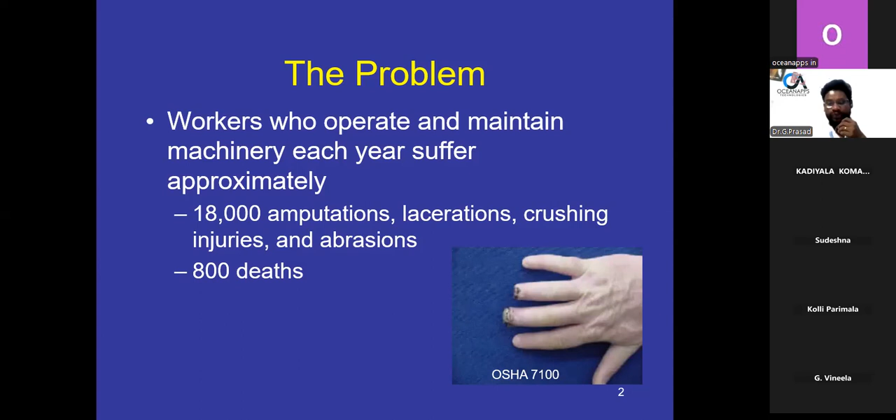See, approximately 18,000 injuries to employees and workers, and 800 deaths. What is the problem basically with the machinery associated with amputations?

That means if you have a good idea - number one, mechanical power presses, whatever mechanical power is supplied to the particular machine, power press brakes, power and non-powered conveyors, printing presses, roll forming and roll bending machines, shearing machines, food slicers, meat grinders, meat cutting bandsaws, drill presses, milling machines, grinding machines.

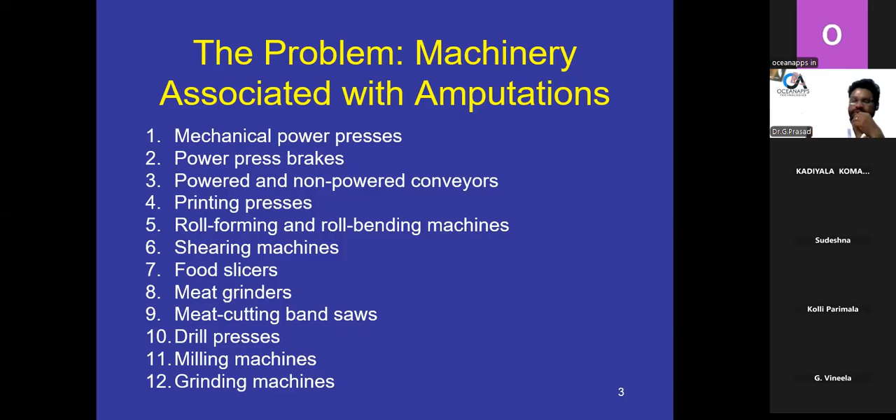These are found in one particular industry. If you have another industry or company, there will be another number of machineries. These are all called machine related problems or machine related hazards. So you must know each and every problem regarding these machines.

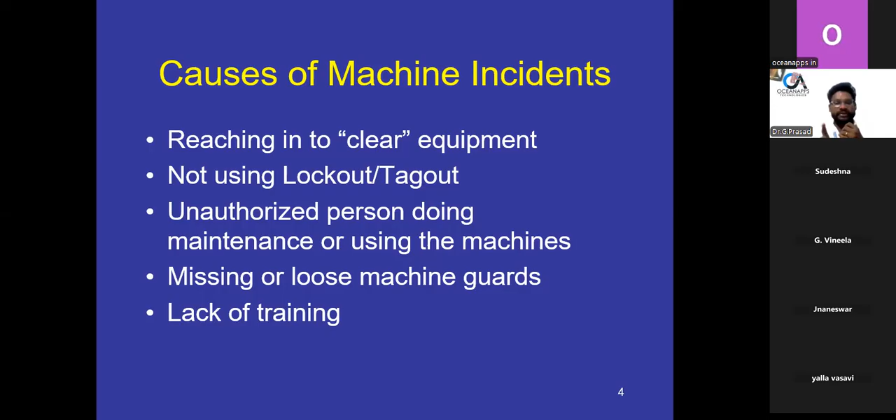Prevention is nothing but a barrier. Prevention is nothing but a stoppage. Prevention is nothing but we have to give a stoppage to all things.

In prevention, what do you have to do? Any machine part or function or process which may cause injury must be safeguarded. Sometimes you have to provide the safeguard.

Next, where the operation of a machine can injure the operator or other workers, the hazard must be controlled or eliminated. Because due to the operation of the machine, it can lead to injury to the operator. If an employee working on a particular machine is not controlling it, you have to eliminate or control that. That depends upon the senior, the safety officer, or whoever is head of that particular process.

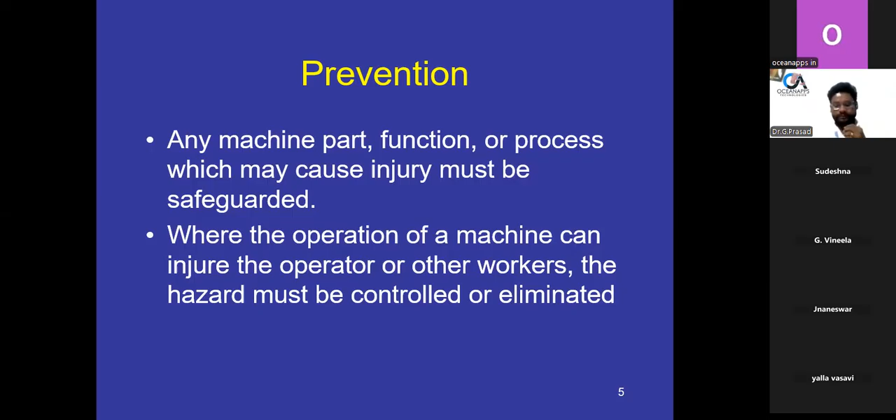OSHA citations are from the year 2010. Already told you OSHA is like a standard health and safety issue, as mentioned in previous classes. Machine general requirement is 1910.212 - the 10th most frequently cited standard, 5th ranked standard in assessed penalties. These are all standard citations.

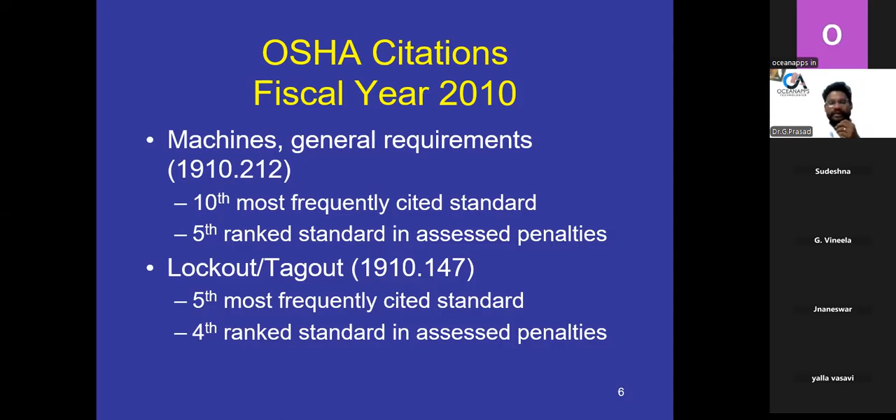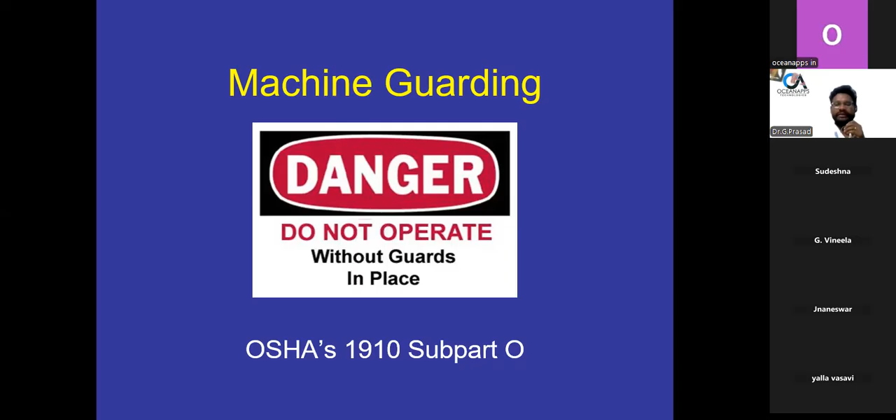Machine guarding - if a machine is not to be operated, you put a sticker on that particular machine. Here, a danger sticker says: do not operate without guard in place. That means for that particular machine, the condition is it will not operate without the guard. This is called OSHA 1910 subpart O, regarding machine guarding.

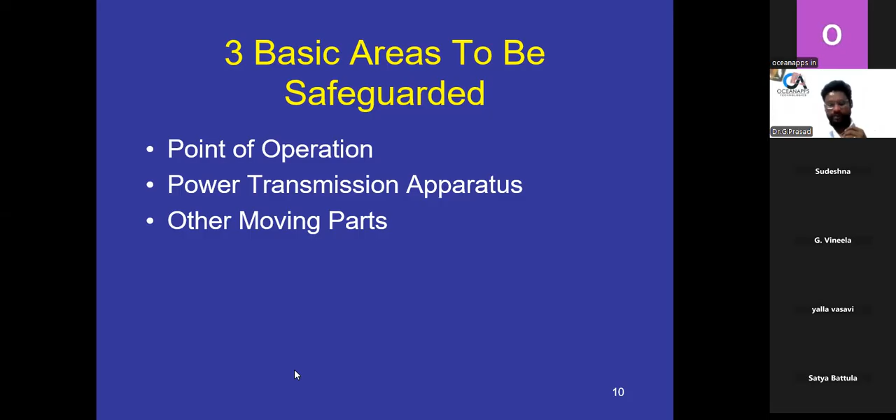Next, hazard identification, where the dangerous things may happen. Where can this dangerous hazard occur, where can these dangerous things happen.

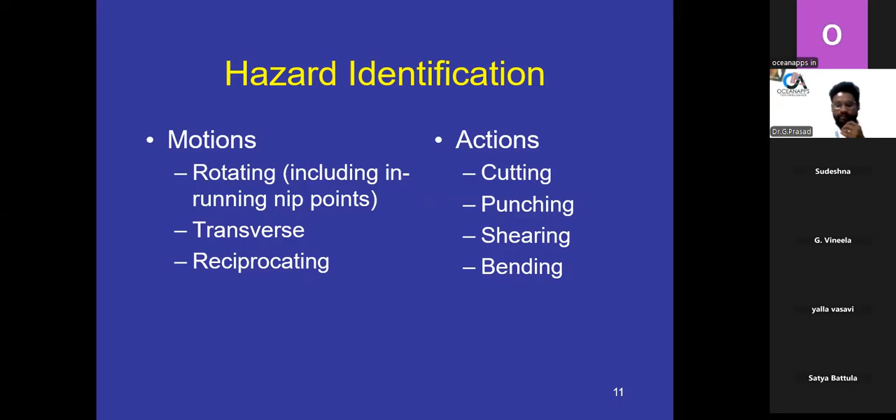Coming to the first one, as already told, rotating parts. In the rotating motion, hazard, machinery grips and move clothing, hair and body parts into the dangerous area. In the rotating part, what will happen?

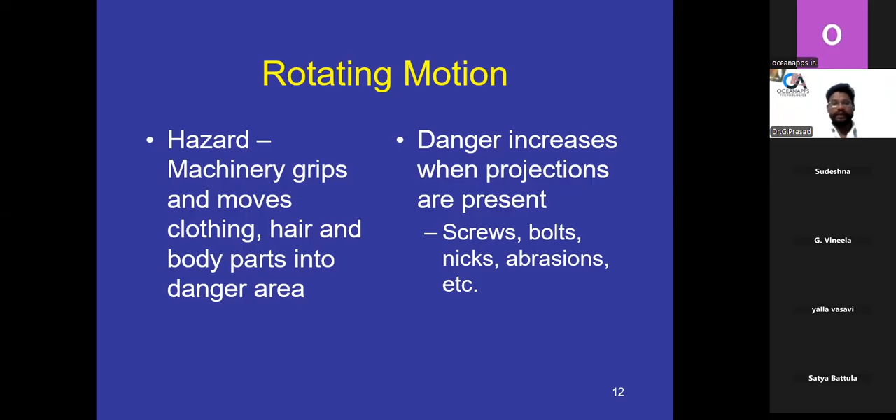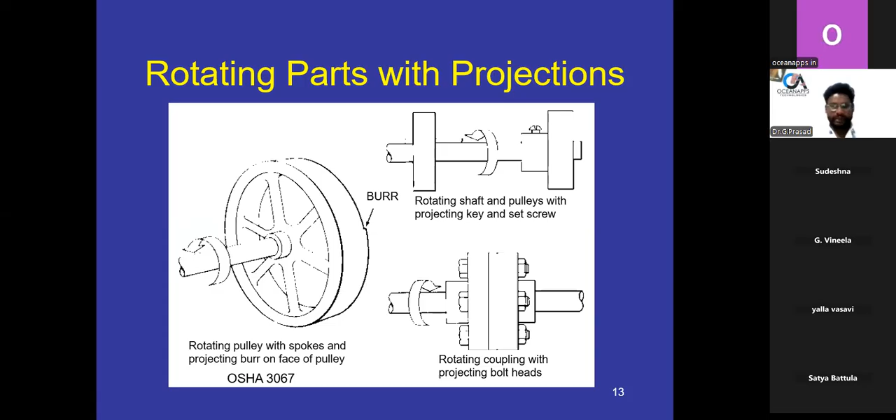Based on that wheel, if there is no guarding, no guard for that particular wheel, then automatically there is a chance to get hazard for the human body or human things. So at that time you have to put a guard. Yeah, these are the in-running nip points.

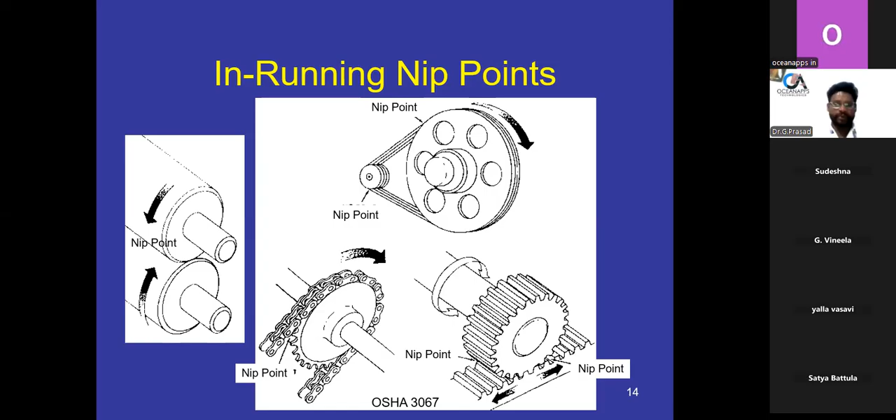So at these in-running nip points, you have to take care about precautions, particularly for those who are working on these machines - the employees, workers, or laborers. These are also machinery parts, so you have to take care about the machinery parts.

Next, second one, transverse motion - moving in a straight continuous line around rotating components. Hazard may strike or catch an employee at a pinch or shear point. This is also one type of getting a hazard or a chance for incidents or accidents.

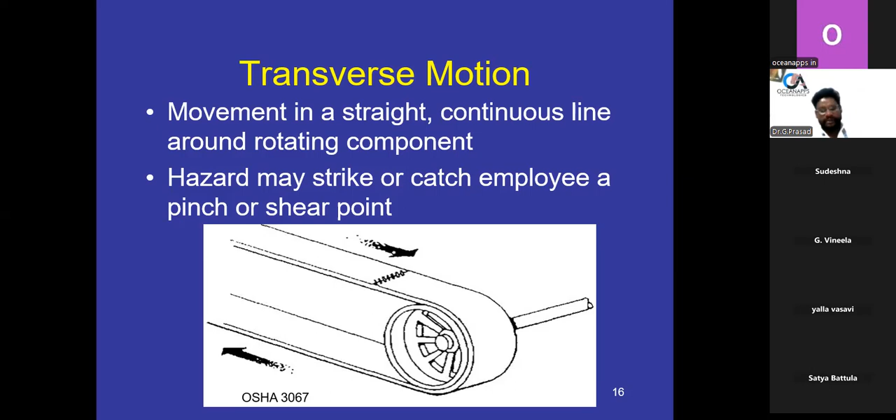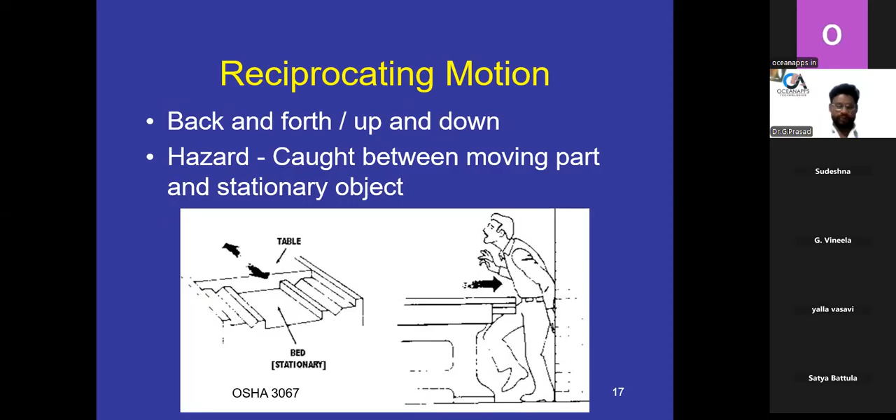Reciprocating motion - back and forth, front and back, up and down. So this is the reciprocating motion. Because while the equipment is moving between the moving parts or a stationary object, you have to avoid moving towards the moving parts, towards the up and down parts, or the front and back equipment.

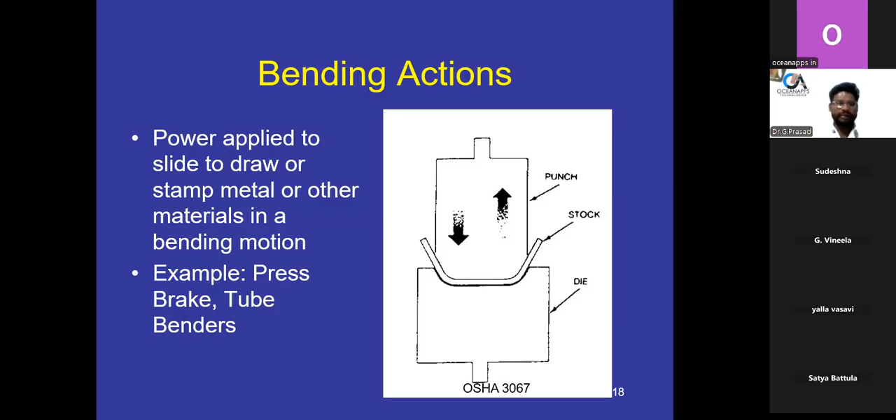This is also one type of bending action. At the time of bending action, you have to take care about power applied to the slide to draw, stamp metal, or other material. Like, where is it used? At places like bench press or press brake or tube, they use it.

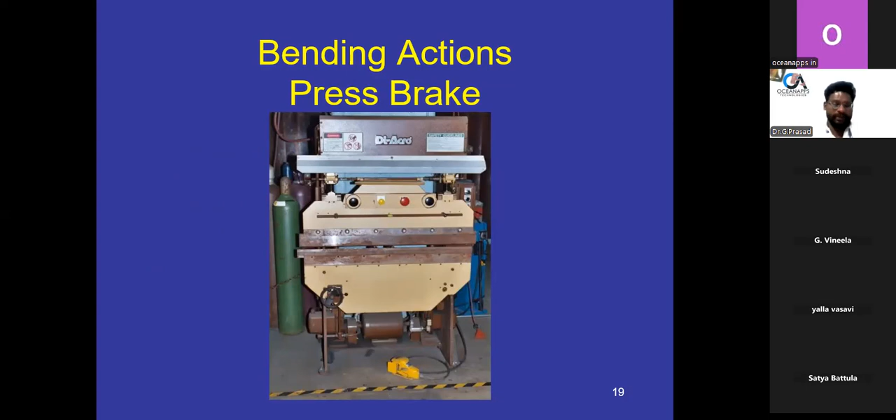So this is one type of bending action, the press brake. Those who are working on this particular equipment must know about it - they must have some knowledge and idea regarding this equipment.

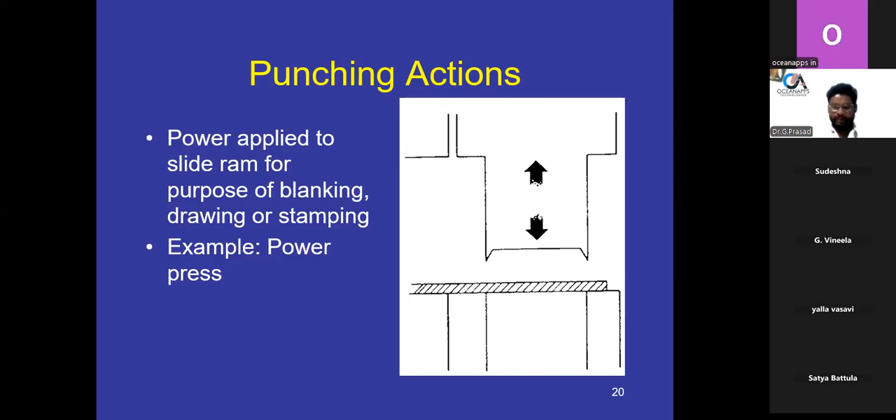This is also one type of punching action - the power applied to the slide ram for the purpose of power press. These are also shearing actions - sheet metal shear. If you see, this is the diagram, this is the real image.

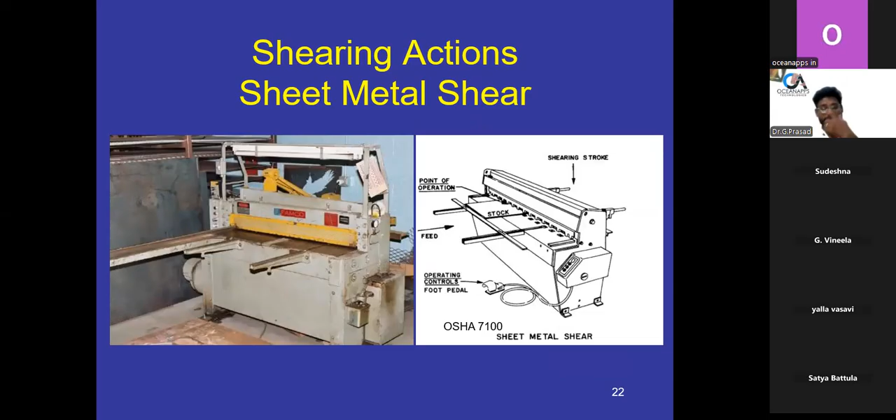This is also one type of cutting action while you are doing the cutting. We have to put proper rotating parts, transverse motion. We have to put proper safety.

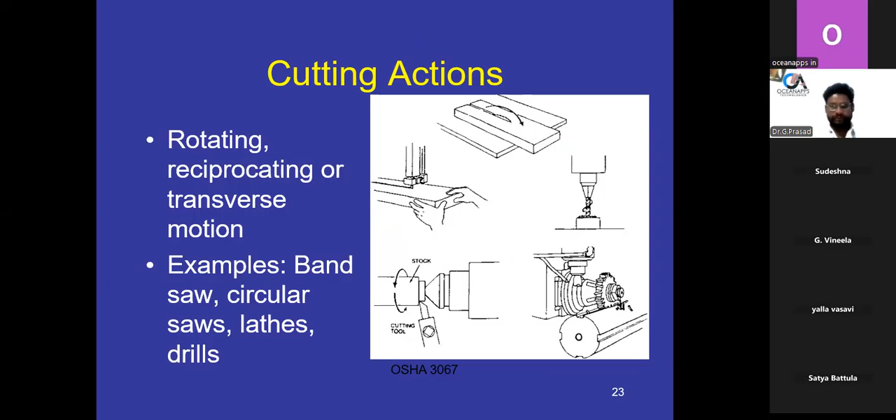Whatever the equipment, based on it we have a classification of safeguards. Number one, guards. Number two, devices. Number three, location and distance, automatic or semi-automatic feed or ejection, and miscellaneous.

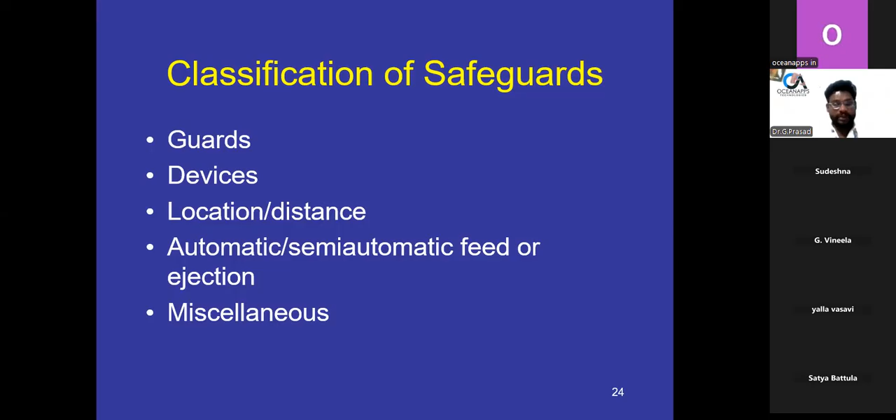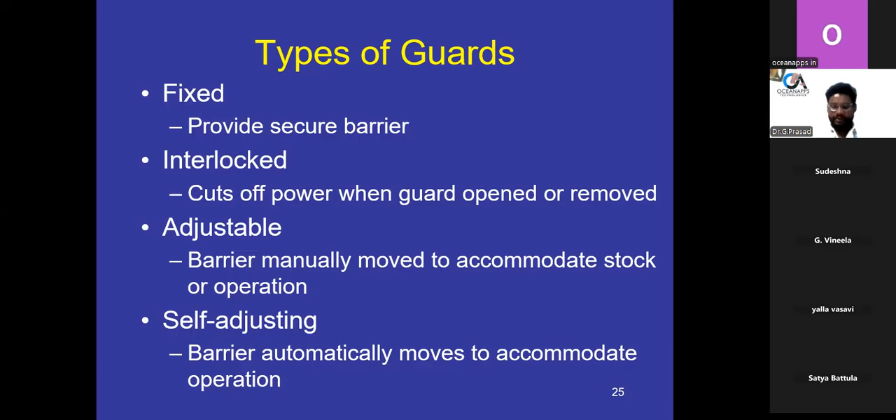Now we are going to classify each and every one. Types of guards: fixed and interlocked, adjustable, self-adjusting. Now let's explain each and every one.

There is one disadvantage - poor visibility, because you can't see what is happening inside the equipment. If you see our bike, the chain moves in a rotating motion, that's why there's a safeguard. You don't know what exactly is happening inside, because if anything happens, for the repair section you have to take out the whole thing.

That's not a very big disadvantage, it's also one type of problem - it must be removed for repair requirements. If you have a repair section, you have to remove all the guard, then only you can go for the repair.

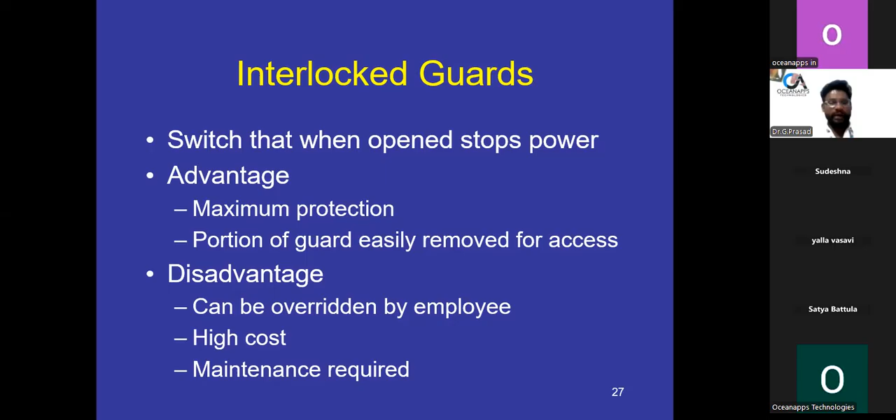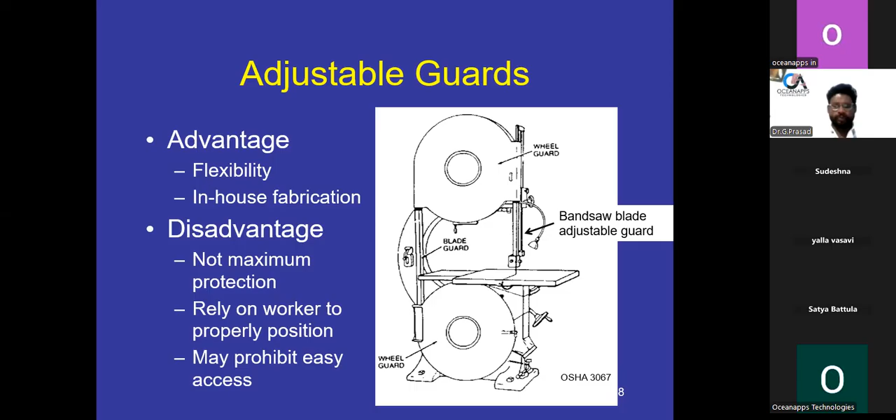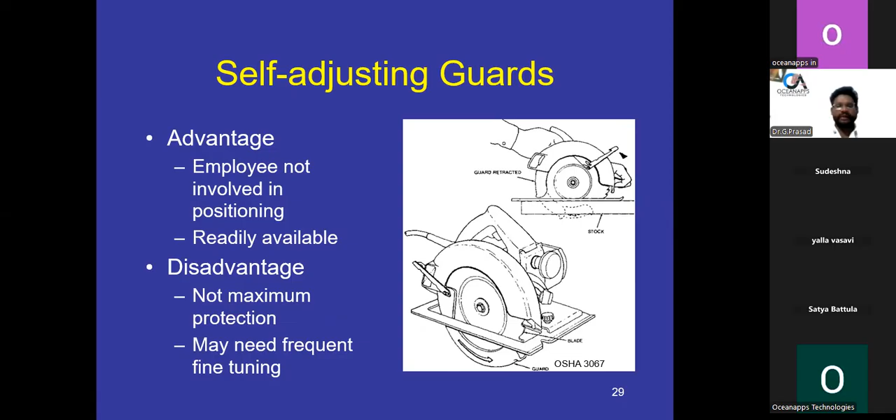Disadvantage: not maximum protection, because some parts show outside of our visibility, like rely on workers to properly position - these may have some disadvantages. Self-adjusting guards - advantages are employee not involved in the positioning, and they are readily available. Disadvantage: not maximum protection, may need frequent fine tuning, and so on.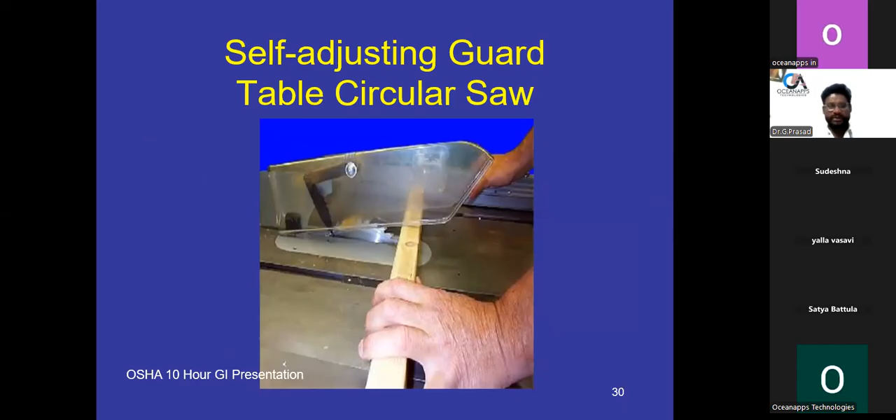Self-adjusting guard is like the table circular saw. This is one type of self-adjusting guard. You can adjust it wherever you want to use it, wherever you want to cut. You can use this type of self-adjusting guard, the table circular saw.

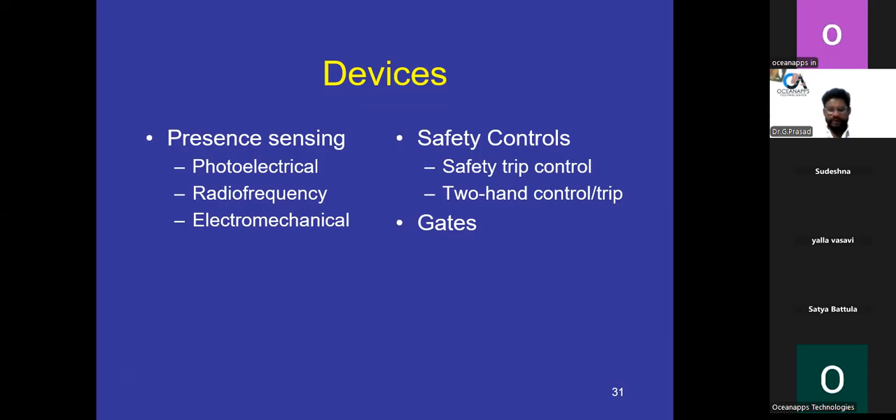Next, devices. This is also one type of conditions, classifications and devices. Presence sensing devices like photoelectrical, radio frequency, electromechanical are used. Safety control, safety trip control, two hand control, and trip gates. This is one type of device sensing.

So you can see if the device is secured well by the sensing guarding devices.

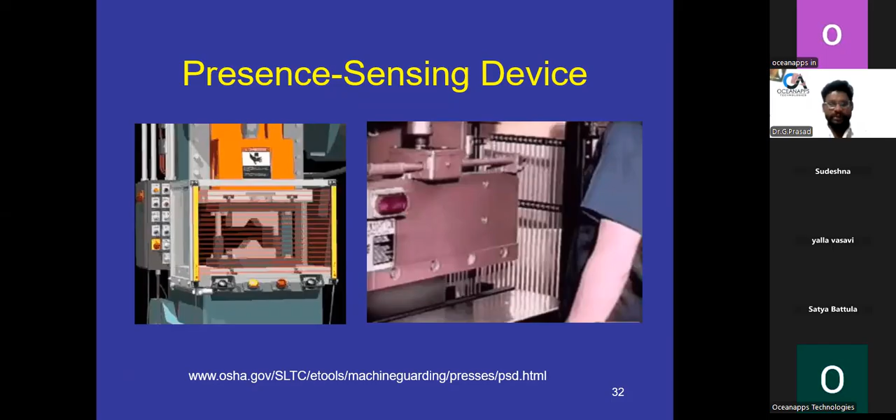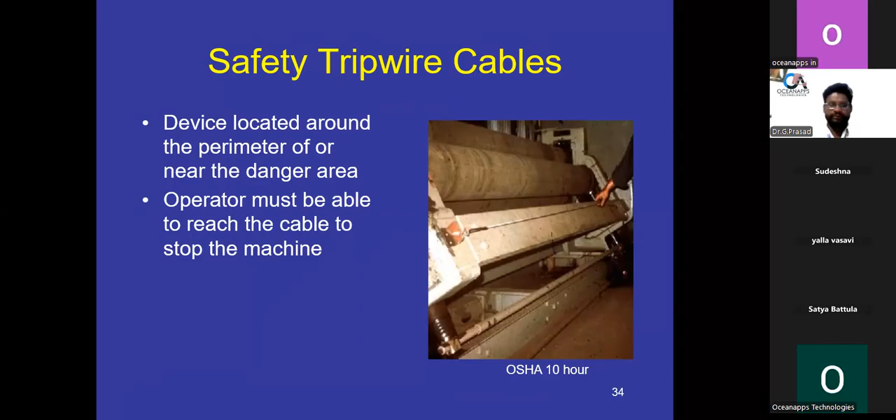Cables, this is one type of cable where you have to take the device location. This is one type of safety tripwire cables. The device is located around the perimeter, near the danger area. The operator must be able to reach the cable to stop the machine. One person takes that type of tripwire. So that is one type of safety for the particular perimeter cable equipment.

Gate - this is one type of gateway equipment, movable barrier devices which protect the operator at the point of operation before the machine cycle can be started. If the gate does not fully close, the machine will not function.

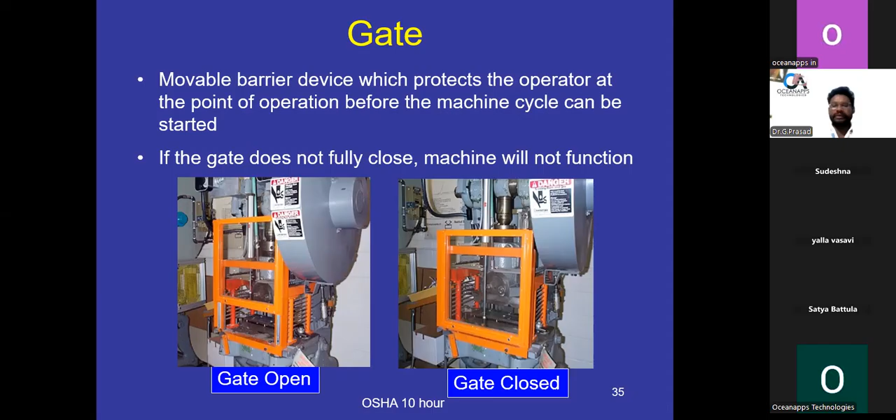This is one type of gate, vertical downstroke baler. By seeing the diagram we can identify different types of precautions or safety conditions.

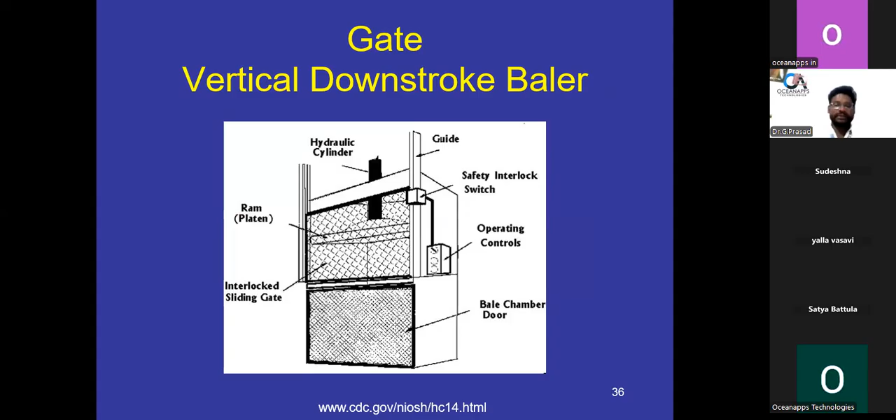These also safeguard by locating distance. One person is operating from a little bit of distance from the machines, because these type of machinery will be more dangerous.

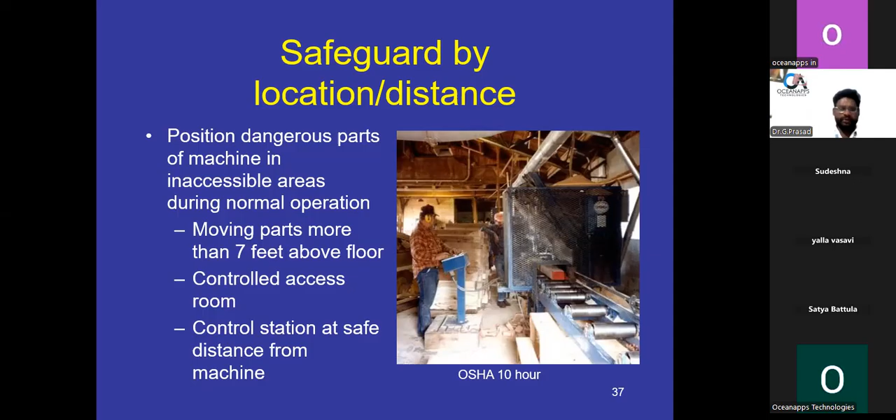So based on the machines, you have safety control. Positioning dangerous parts of machines in inaccessible areas, during normal operation moving parts should be more than 7 feet above the floor. Controlled access room, control station, stay a safe distance from the particular equipment.

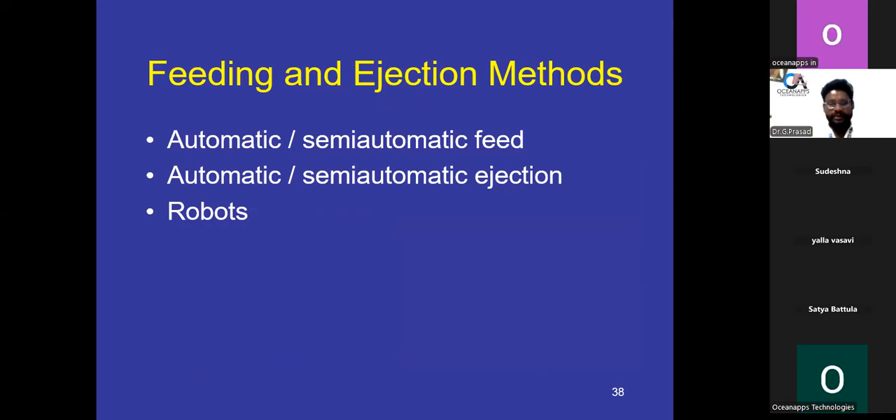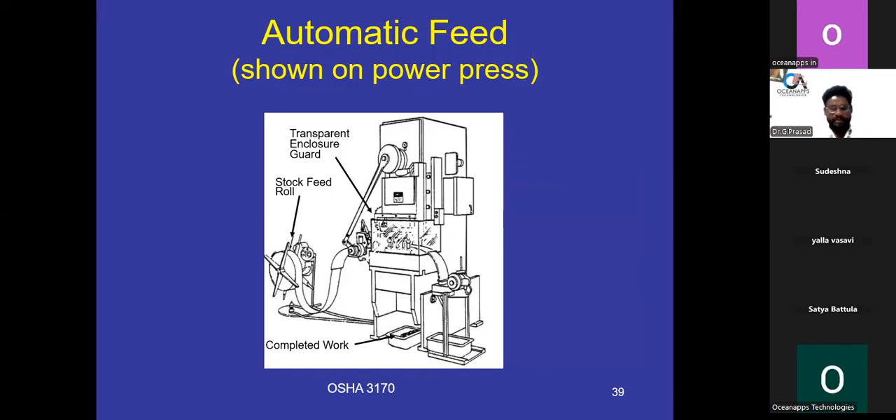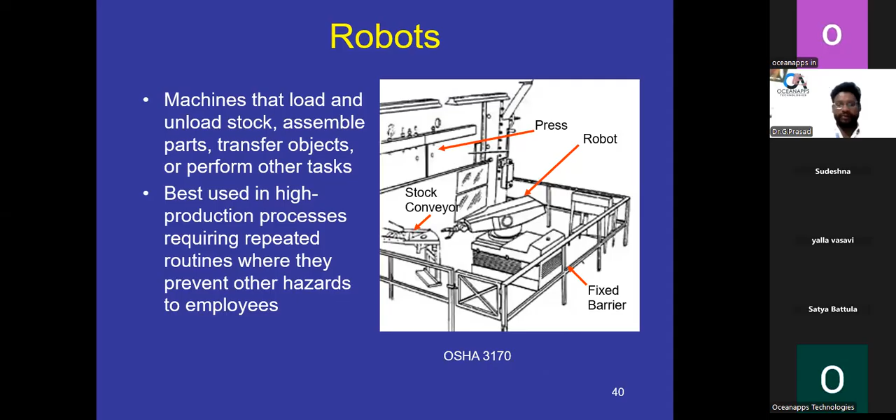Feeding and ejection methods - automatic or semi-automatic ejection and robot. This is also one type of automatic feed shown on the power press. This is also one type of robot machine. By seeing these, we don't have exact idea about the safety and precautions for these machines.

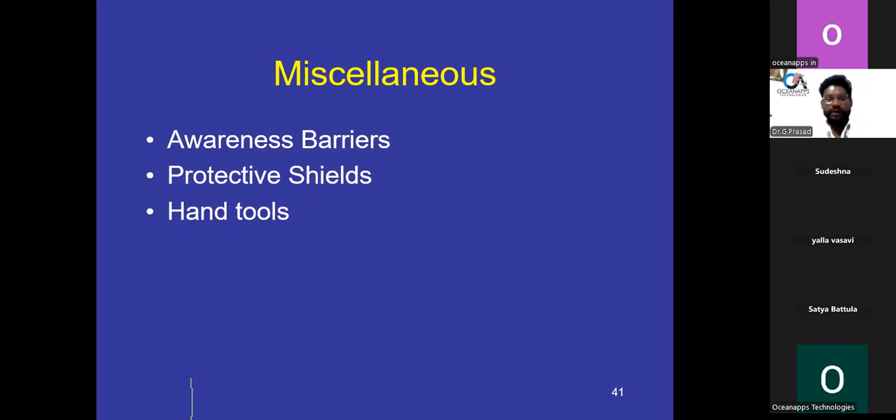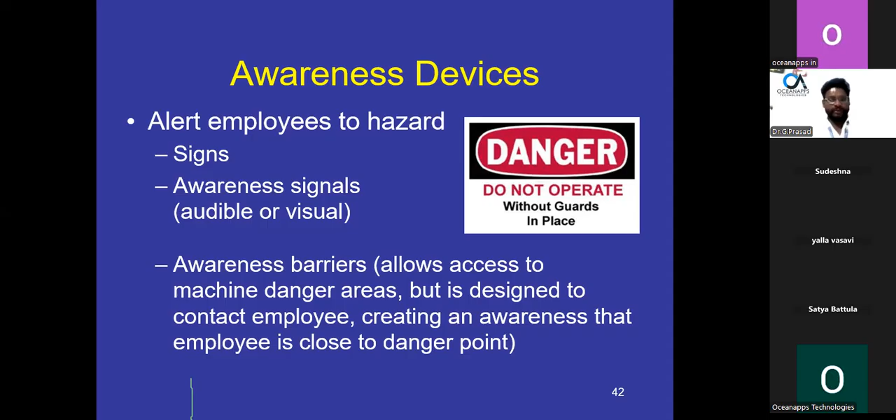Miscellaneous other combined equipment - nothing but awareness barriers, protection shields, and hand tools. What is an awareness barrier? It's nothing but simple labels or simple awareness signals, because it can give proper idea for the particular equipment, for the particular employees, particular labor.

So there is a protection shield - you see completely there is a shield on the particular machine, because it's protecting human hands or body parts from getting involved inside the machine.

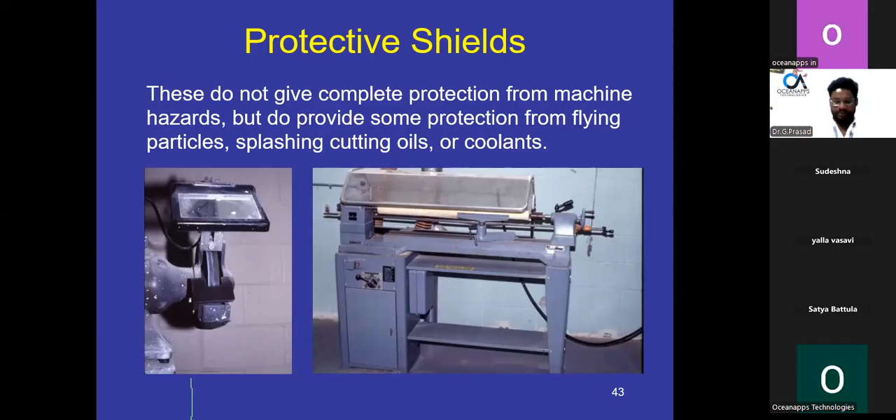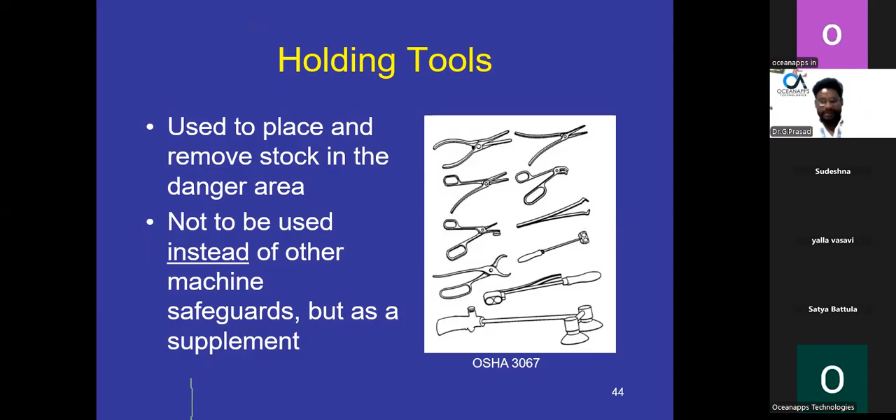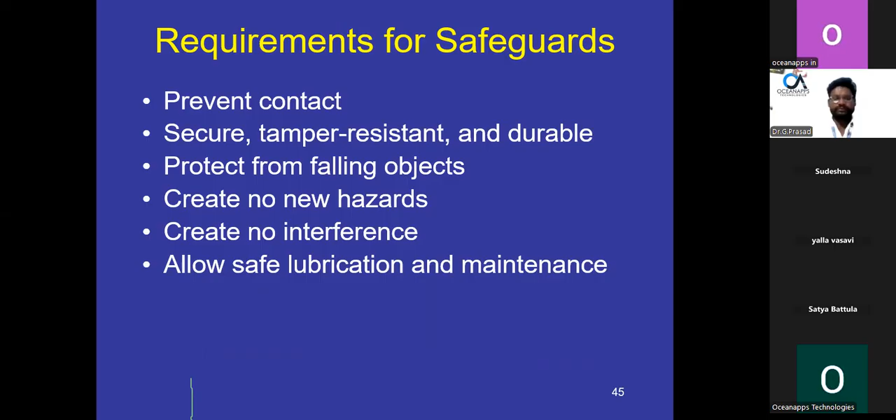These are requirements of safeguards - to prevent contact, secure tamper resistance, protect from falling objects. What is the requirement? Prevent contact only, create no hazard, create no interference, allow safe lubrication and maintenance.